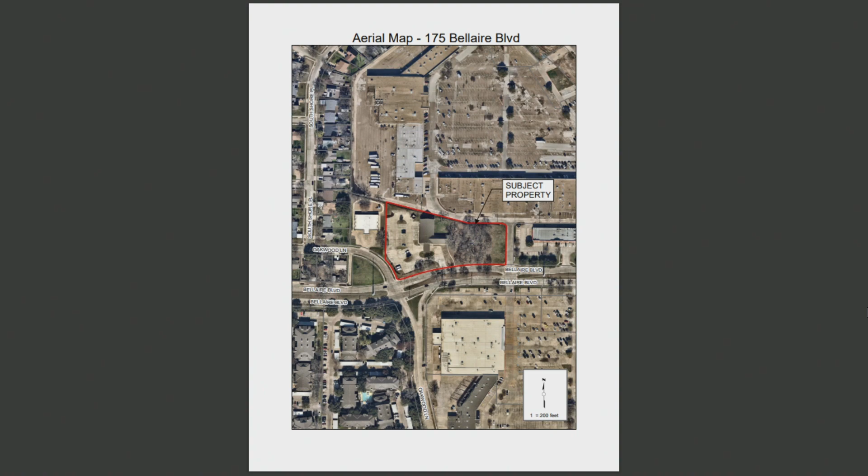Good evening, Commissioners. The Chin Evangelical Baptist Church is an existing use that hopes to add a gymnasium and some additional parking. Through the engineering site plan process, a need for an alternative standard for the ground floor window coverage was identified. This is not feasible to provide windows within a gymnasium. Per the Unified Development Code, Article 6, Chapter 8, 40% of the ground floor facade facing primary arterials must be made up of windows or doors. The applicant is proposing an alternative to use a dark-toned brick mix to replicate the shape of windows to mimic that pattern.

There we go. You can see it in this image there, that's the alternative they're proposing. Staff finds this alternative standard to align with the purposes and intent of the UDC and that it's consistent with the comprehensive plan. Moreover, it maintains harmony with the overall objectives of the local commercial zoning district. The modification is being kept to the minimum necessary to address the unique conditions related to the development. Staff recommends that the Planning and Zoning Commission recommend approval of the alternative standard as presented. I'm here to answer any questions you may have, as well as the applicant.

What are those faux, fake windows made of, the dark part? They're just the same brick that's going to be used elsewhere, just a darker color to replicate that.

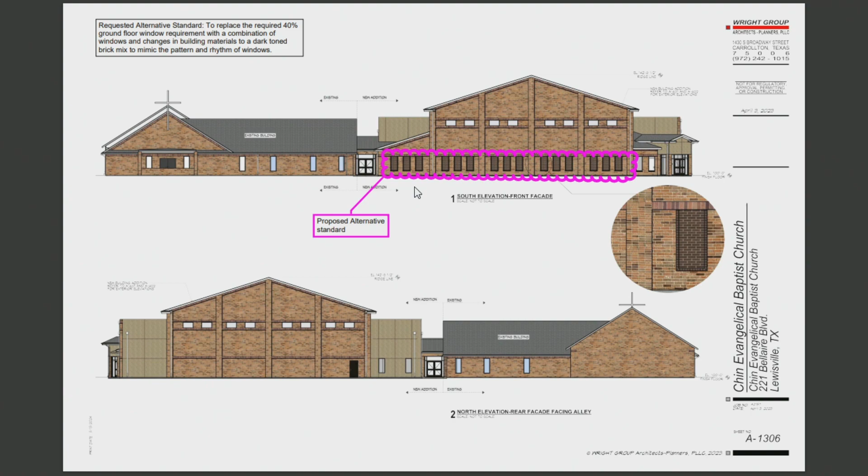This type I see in the other picture. Yeah, this type of alternative was also approved for another site a couple of years ago, that was a shooting range. So that was another example where it wasn't feasible, and they kind of based what they did off of that alternative standard.

Is it actually a different brick, different with that color, or are they painting the brick? It's going to be a different brick.

Anything else for staff? Any questions for the property owner? No? If there are not, may I have a motion, please?

Motion to approve the alternative standard as presented. Second. Motion is by Rick, second by Karen. Vote now. Motion passes 7-0.

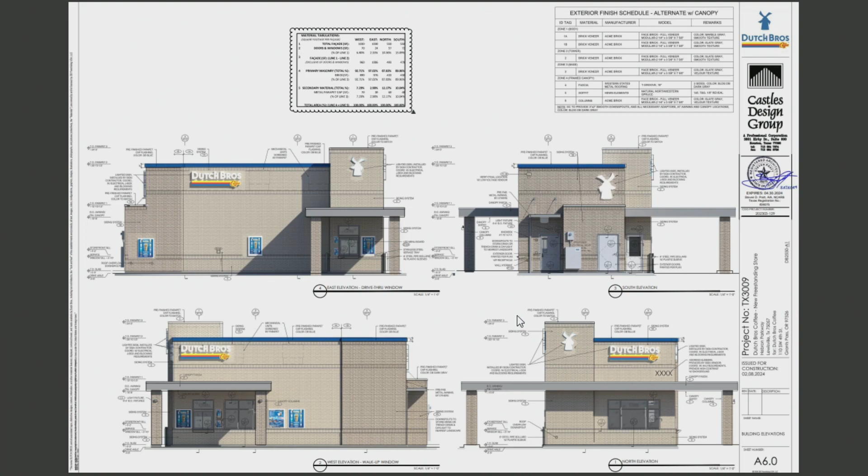Staff feels that these deviations will enhance and extend the green initiative within the comprehensive plan, and it'll soften the transition from the roadway to the trail in the back with the additional street trees that are going to be added. I'm here to answer any questions you may have, and staff recommends that the Planning and Zoning Commission recommend approval of the alternative standards A, B, and C as presented.

Commissioners, do you have any questions for staff? Nope. Okay.

Any questions, Jack? Or are you just thinking? No, I can't resist. Can you describe their neighbors?

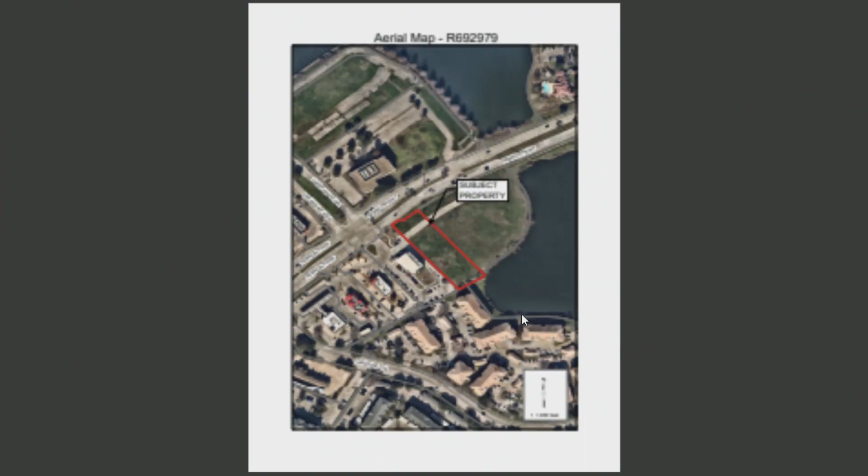Yeah, so let's go back to the aerial. That might be useful. They're all quick service restaurants—you've got Taco Casa and Jason's Deli immediately adjacent to the west. To the south you have the apartment communities and the ponds. On the north side there's an office building, and there's more room for future office or other types of commercial development.

So the alternative standard here, the significant one with the building orientation, we worked with them quite a bit on that one. The intent with the building orientation is really to engage the street to help make it more of a pedestrian-oriented type area. I think it's a little bit of an uphill battle given that there's a bunch of quick-serve restaurants and a gas station right in the immediate vicinity. Secondly, our trails plan does call for a trail along the levee ponds that are right there. So our intent with this, we encourage them to provide pedestrian enhancements along that pond, to really upgrade that as a pedestrian area so we still have some walkability even if it's not really engaging on 3040 Hebron Parkway.

Now he asked a question. Now I'm going to ask one. The rest of the land right here that's adjacent to it, is that land available to develop? The land to the east is undeveloped, and there is some interest in it, but it would be developed with a different user.

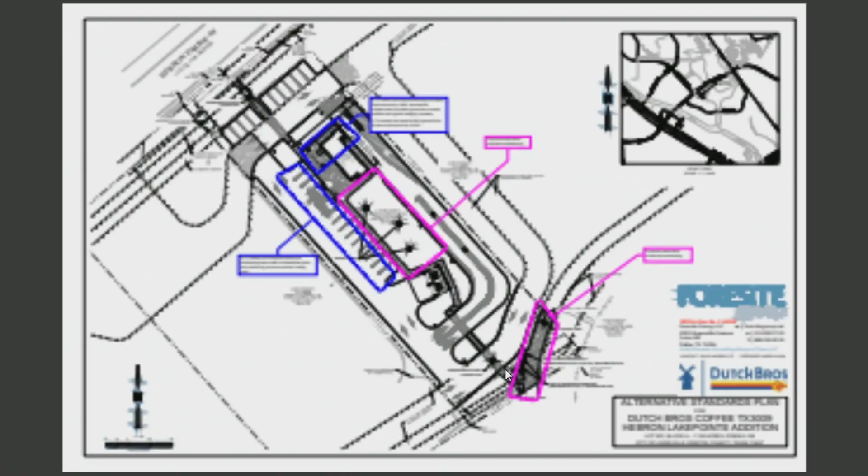So in the next year, they'll install as it's drafted here, but with just grass on either side for the foreseeable future? Are they installing, or is this just an easement, because it's kind of a small portion? They're installing. So that's part of it, they're installing the pathway as well as the benches, the street trees. Am I able to zoom in on this? No, okay. The street trees, the benches, the trash cans back there. And then the ESP is still going through revision, but in the last set of comments, Parks is working with them to have where the pavement ends there to be set up for the property that goes in next door to just easily continue that pavement.

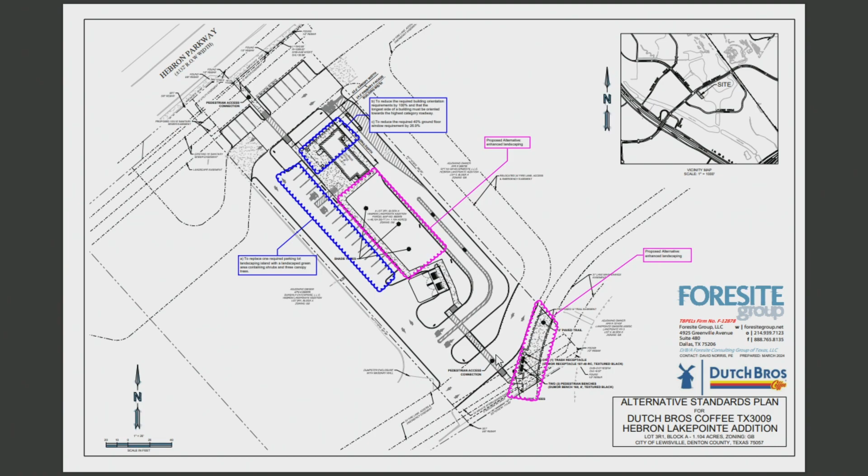Okay, if there are no further questions or discussion, may I have a motion, please? Move to approve alternative standards A through C as presented. Motion by Karen. Second by Rick. Vote now.

Motion passes 7-0. Commissioners, this item will be considered by the City Council for a final decision on Monday, May 6th, 2024 at 7 o'clock p.m. Thank you. Thank you, Richard.

Okay, the next item on our agenda tonight is a presentation, which is an update on the Business 121 Corridor Plan. Good evening. I know some of you are also part of the Lewisville Ambassadors Group, and so may have heard some of this presentation as part of that group. But I wanted to give the Planning and Zoning Commission an official update on the Business 121 Corridor Plan and where we're at with that project.

Just as a summary, why are we doing a plan for Business 121? It's a major thoroughfare for Lewisville. It connects residents to commercial areas within Lewisville and beyond. For a lot of people, it's their gateway, it's their first impression into Lewisville. What we're looking to do, what we're expecting the outcomes of this to be, are to improve the look, feel, and functionality of the corridor. We're trying to identify areas where we can make improvements for safety, beautification, and economic development. So those are our main goals with this project.

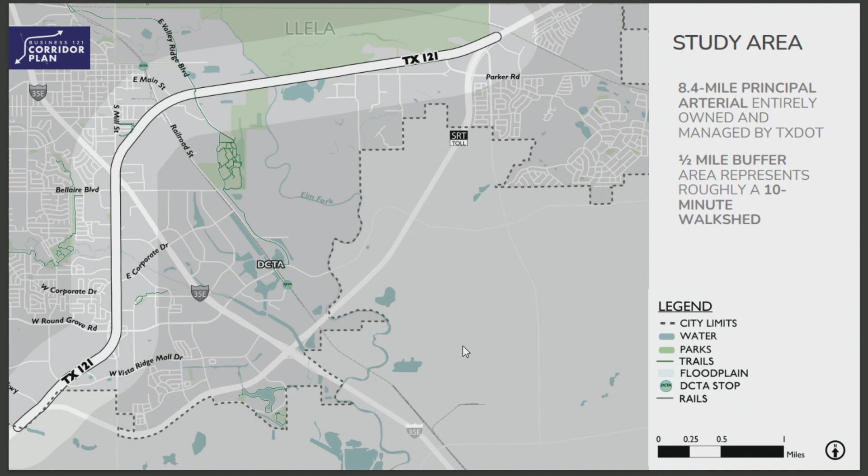So where we are right now in the project schedule is phase 3. Phase 1 was really our consultant team coming in and gathering a lot of the background data. We also did phase 2, which was where we did our initial outreach events.

Right now we're working on developing what a vision might be for the corridor, and what some of our goals and larger strategies might be. We'll then take that back out to the public and to key stakeholders to refine and calibrate it for the city of Lewisville before we finalize the plan, hopefully this fall.

In the corridor-wide analysis, we looked at the context, existing plans, assets, land use, and population profiles. We looked at the existing mobility networks in terms of safety, access, driveways, crash analytics, commute characteristics, and connectivity with different modes of transportation, including sidewalks and bicycles, making sure there's adequate tie-ins to the DCTA train station. We also have a sub-consultant diving into market trends, looking at industrial, residential, retail, office, and hospitality.

We've divided the corridor into 5 sub-areas based on the existing character and built form. We've got the east end where Business 121 connects back on the east side with the toll road over towards Castle Hills. We've got the Elm Fork LLELA section in the middle, where you're going by all that natural area even if you don't know it when driving by. You've got the Old Town section where Business 121 goes south of Old Town. You've got the Corporate Drive area south of 35 going to almost 3040, where we have a lot of residential and neighborhood-serving commercial.

And then when you go south of 3040, it changes into more of a warehouse office kind of format and a different sort of streetscape. So those are the 5 sub-areas that were created.

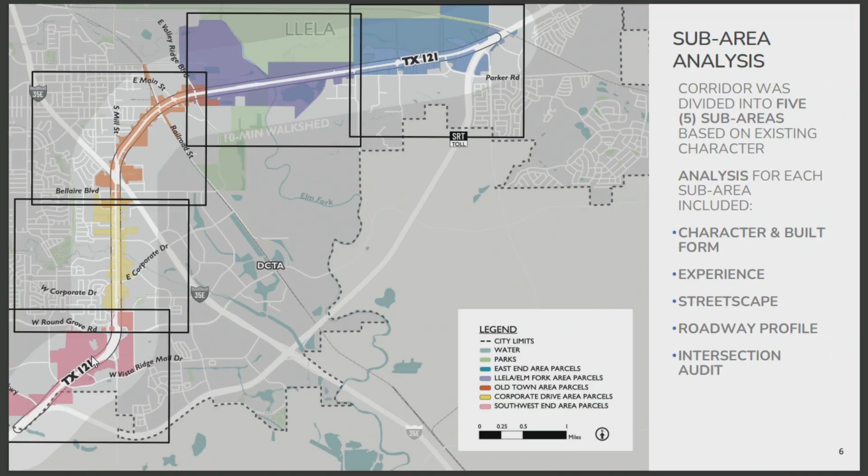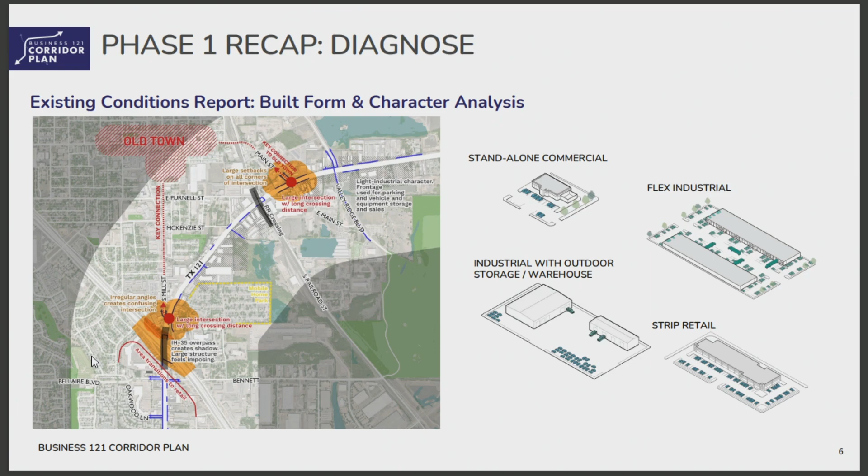With phase 1, we prepared an existing conditions report that looks at those sub-areas and the characteristics of the built form. It also looks at the roadways and where we have intersection issues, and those blue lines on the map indicate where there are sidewalks, so any gaps indicate gaps in the sidewalks. It also looks at the railroad crossing, just trying to get a really good sense of the context of the corridor as we go.

The key takeaways from that finding were that Business 121 is a gateway to Lewisville, but it doesn't always feel like it. For a lot of people, it's their first or only impression of Lewisville, but it doesn't tell our full story as a community. The Old Town connections in particular are hidden away, and people don't know that's there. People might not know what LLELA is when they go by.

Cars are evidently the king of the corridor—everything is oriented to the automobile. The sidewalks and buffers vary. In some sections there's actually quite a lot of sidewalk, but it never feels like it meets the scale of the roadway in general, and it never feels quite comfortable to walk on.

We need to make aesthetic improvements on Business 121, but to make them really effective they need to be coordinated, because as individual properties redevelop, meeting the standards of our overlays or different plans isn't quite getting the impact we need. So we want to look at doing some sort of more coordinated aesthetic improvements. The entire corridor needs those aesthetic and functional improvements, but the same interventions won't work everywhere—we have these different character areas we need to address.

For the mobility analysis in phase 1, the key findings were that motor vehicle accident hotspots are at the intersections—this is for motor vehicles—at Bellaire, Corporate, Mill, Southwest Parkway, and Valley Ridge. Our consultant team went out and did intersection audits to identify what some of the key problems were at those intersections.

Also, pedestrian and cyclist accidents are mostly concentrated in that Corporate Drive area south of 35, north of 3040. Many of those are actually located away from intersections, indicating there's not adequate safe crossings for people to get across from one side of the roadway to the other. There's also a high number of driveways along the corridor, which impedes traffic flow and creates safety issues for users, and often there are driveways right adjacent to an intersection, which can be problematic.

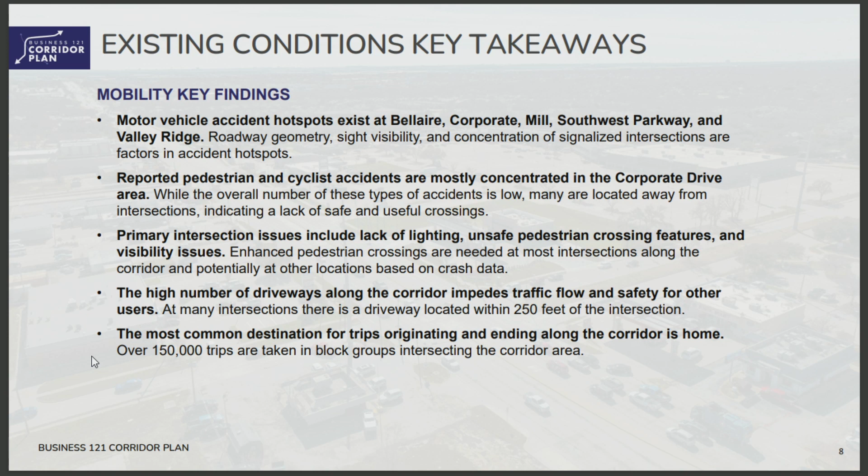One of the most common destinations, though, for any trips originating or ending along the corridor is home—that's where people tend to be going to or from. And one of the major intersection issues is the lack of lighting and unsafe pedestrian crossing and visibility issues.

Looking at the market analysis, some key takeaways were that there's strong growth in the multifamily residential market that's limited by land capacity. We've seen a lot of that multifamily growth recently in the Castle Hills area, Crown Center, where there's some under construction, and also in the Old Town area. We want to target any additional multifamily really into the Old Town infill locations and not along the rest of the corridor.

So despite the fact that the market summary is very strong and would likely support it everywhere, I know our goal as a city is to keep that in Old Town. For sale residential also is having strong market performance, particularly for detached housing, so there could potentially be opportunities for creative redevelopment of shopping centers.

We did have a meeting today where looking at retail per capita, we're on the high end, so maybe that's something we dive into a little bit deeper. Industrial, there's substantial new industrial development. However, the priority really needs to be on making sure that we're having industrial development that really is generating jobs and is compatible with the other uses on the corridor, or it's going into the appropriate locations along the corridor.

Office is still a very limited market ever since, even really before COVID, and it's still very limited. Retail, the majority of new investment is single tenant, smaller structures, and that goes back to there actually being a lot of retail space along the corridor today. So really we need to look at how do we reinvigorate that space and get people to reinvest in the space that already exists.

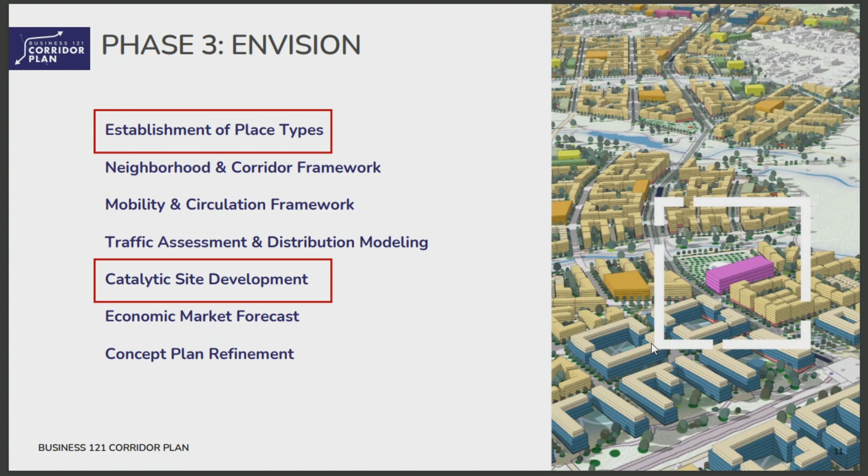So the place type frameworks do reflect a lot of things from our 2025 plan, as well as from zoning and the existing conditions that are out there today. There are 9 place types. Two of them are really residential neighborhoods, which focuses more on single family housing, and residential mixed use, which is more multifamily, but where you're adding in commercial components.

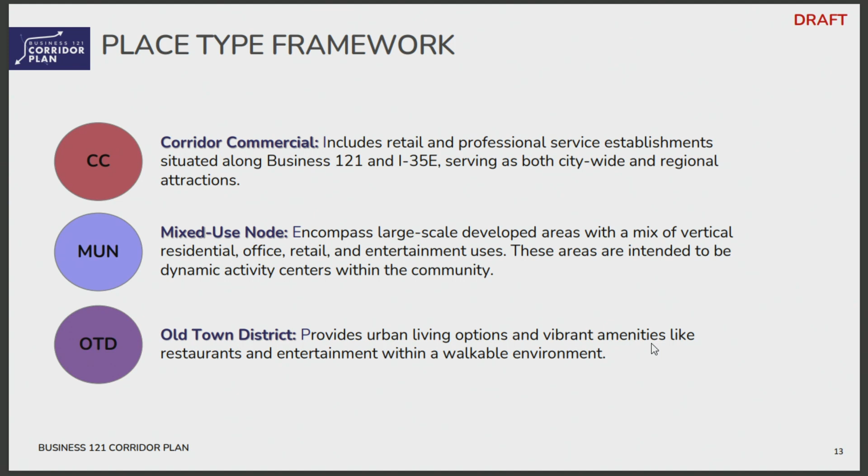Our green centerpiece really is celebrating just that, our green centerpiece from our 2025 plan. The corridor commercial is the retail and professional service establishments. A mixed-use node is intended to be more dense, large-scale developed areas with that mix of residential, office, retail, entertainment uses. We have the Old Town District, looking at Old Town as it continues to grow and move east with the transit-oriented development area, making sure we're really tying into Old Town in some areas.

Looking at our industrial legacy buildings, which are our longstanding small-scale industrial buildings, the wholesale trades and auto-oriented uses, and focusing on efforts to improve the built environment in those areas. Then looking at our industrial transition, which is that area between the Old Town District and the industrial legacy place types, trying to help facilitate that shift more towards Old Town from what is our industrial legacy, which there's so much of it that portions of it probably will be there for quite some time. But then also looking at our industrial economic centers, which are more of our large format, sometimes more modern industrial centers.

One thing we're going to be using, and we'll bring back before you with a little bit more detail, is ArcGIS Urban as a scenario planning tool and as a visualization and modeling tool. It's great because it helps create 3D visualizations and simulations to better understand spatial relationships. You can also put in assumptions about what that space entails and how it would impact traffic.

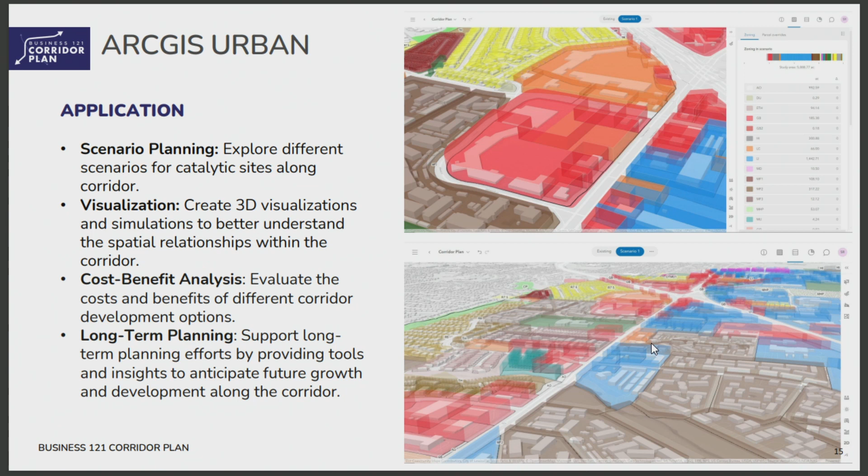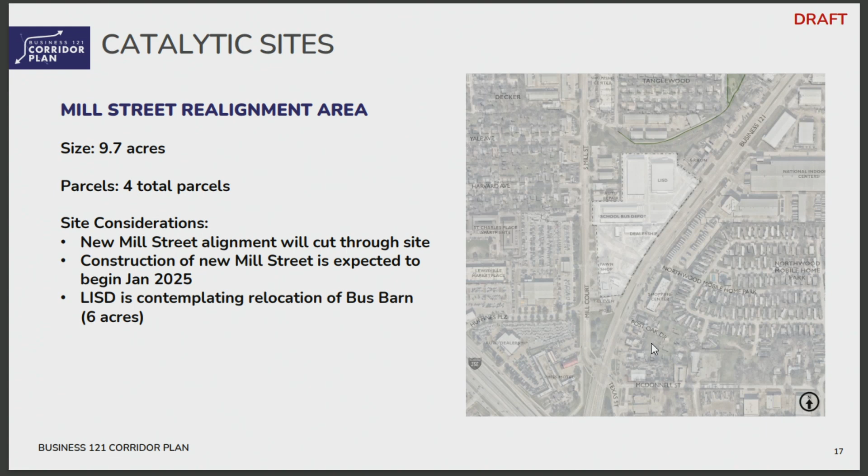And how that would impact economic development, which allows you to do cost-benefit analysis and support long-term planning. So the three catalytic sites we're working with are the Mill Street realignment area. This is where Mill Street is being realigned to intersect Business 121 farther north than it does today, to provide better spacing from the intersection with I-35.

It's going to line up with the driveway into the Northwood Mobile Home Park, but that does provide some opportunity for redevelopment. The second area is the Bellaire and Lakeland plazas. We're kind of combining those two older plazas together. It totals 41.6 acres, and we have some rather large underutilized parking lots.

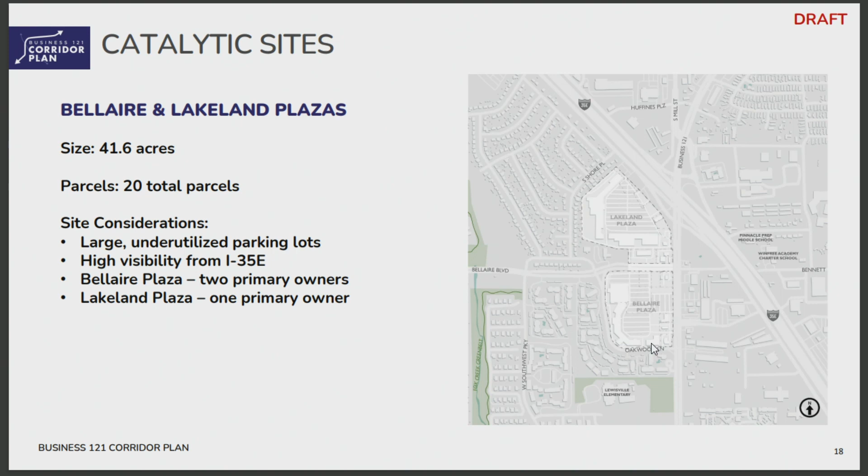So we're trying to think of creative ways to encourage reinvestment in those areas and make them more productive uses. This site is interesting because it's very highly visible and accessible from I-35. There aren't too many property owners, so if they were on board with the plan, you could easily see something happening there.